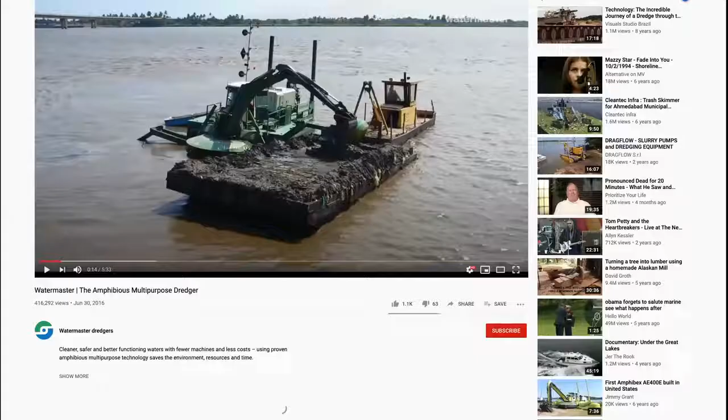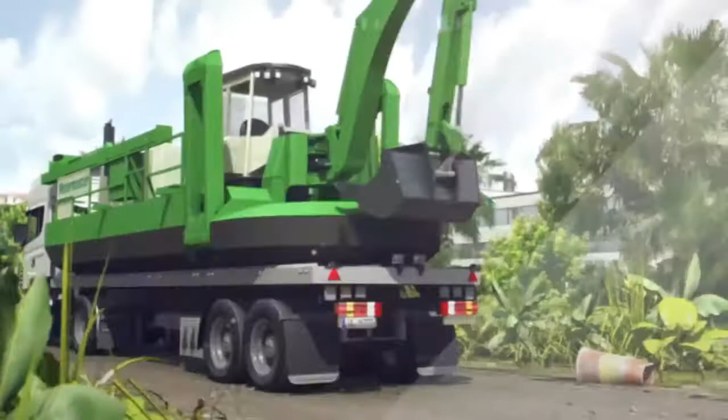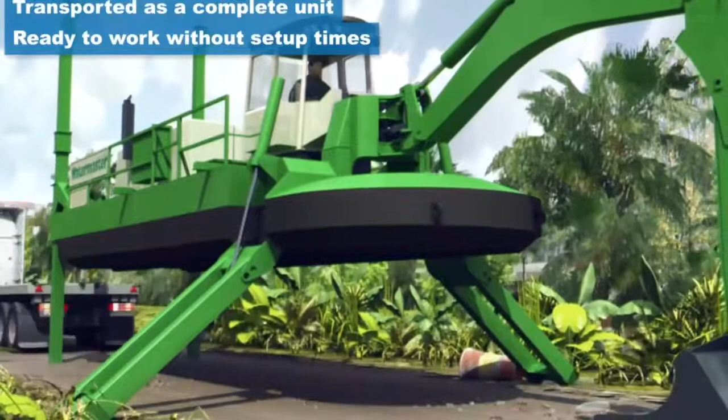Okay, Peter, lunchtime. Peter, you want to? Well, the truth is I cannot see the video. I can see all you guys, but I can't see the video.

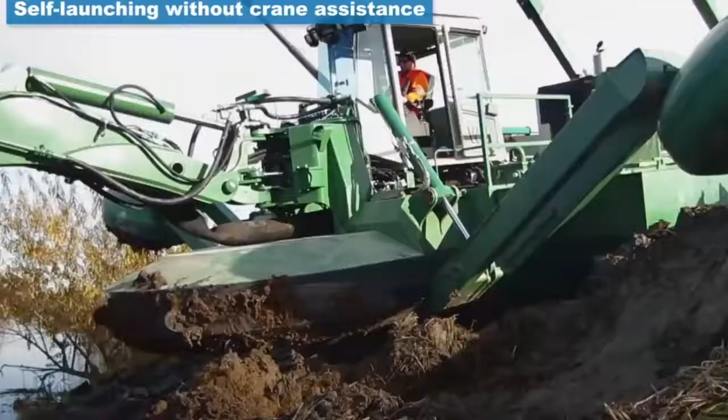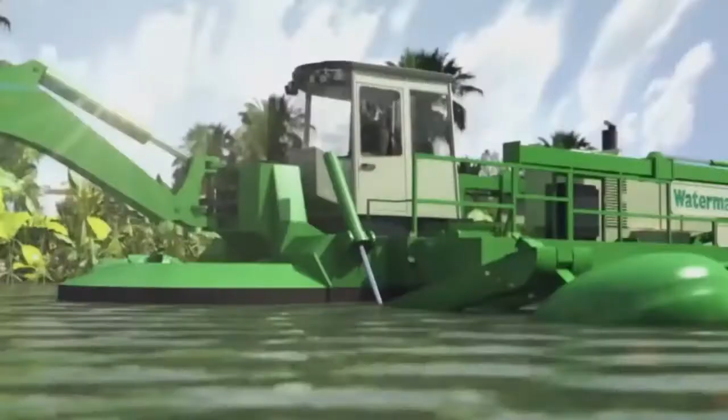You're not seeing the video. So that was footage of it. You can see how it's deployed from a lowboy, and it walks hydraulically off the lowboy, and then can walk into any body of water. So no cranes are necessary to deploy this. Then it is self-propelled, it will do approximately up to 5 knots. Very nice. And it will do all manner of maritime construction up to 20 feet in depth, from shoreline to 20 feet. That's our niche. Very good.

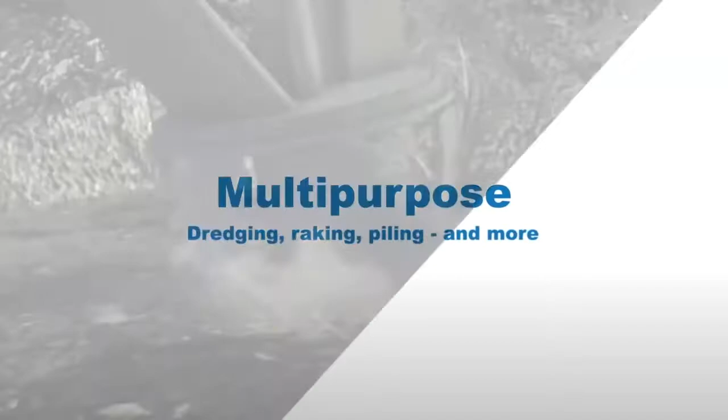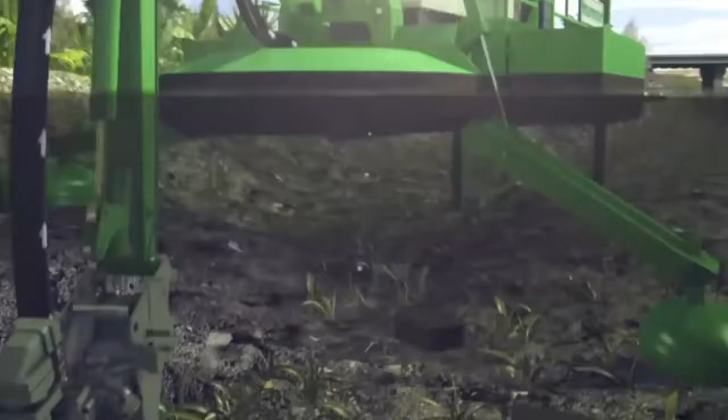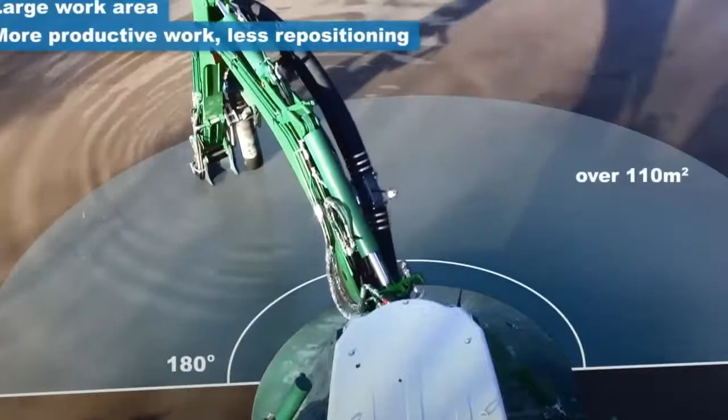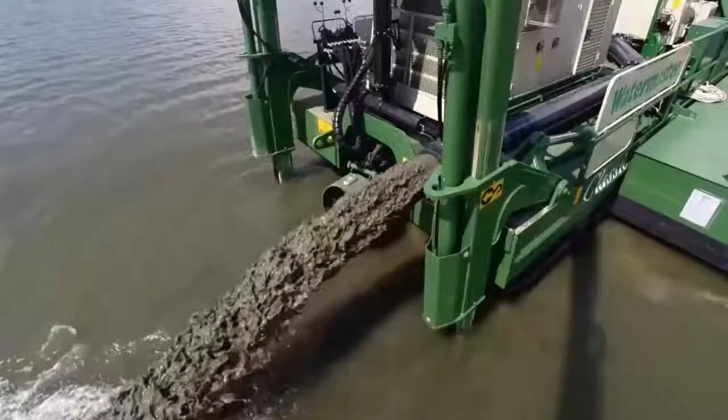It'll do traditional hydraulic dredging. It'll do mechanical dredging with a variety of different buckets we have, including environmental clamshell and tooth bucket, as well as a material bucket. It covers 130 square yards of area for every pass it makes, so it's a highly efficient vessel in terms of the dredging process. You're spending more time cutting than you are moving, and this is a huge feature of this machine.

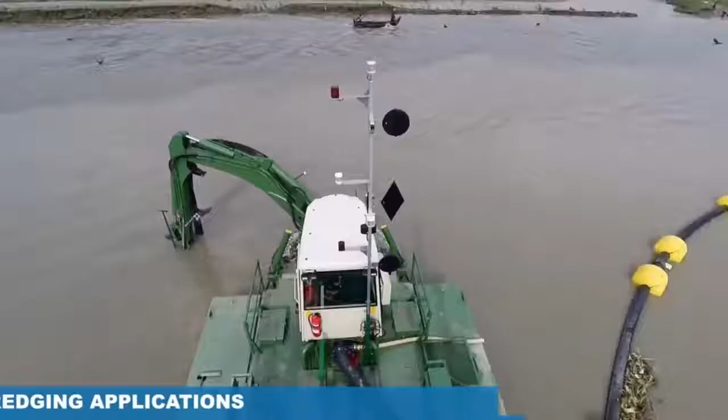It'll also do rainbowing, but we don't see much of that done in the US.

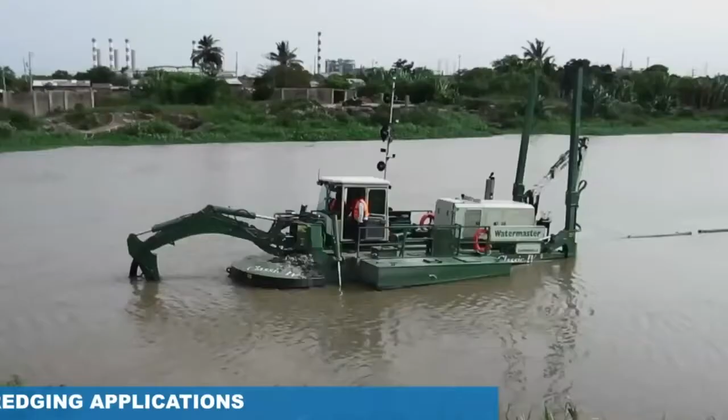It's got a comfortable operator's cab. It has no digital readout, so it is reliable. It will not fail the way we see a lot of digital components.

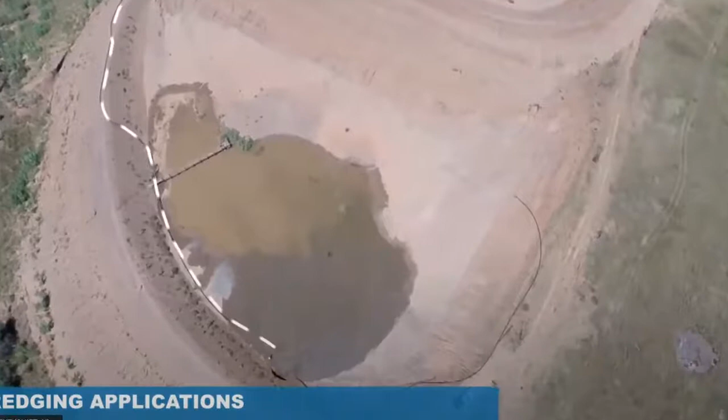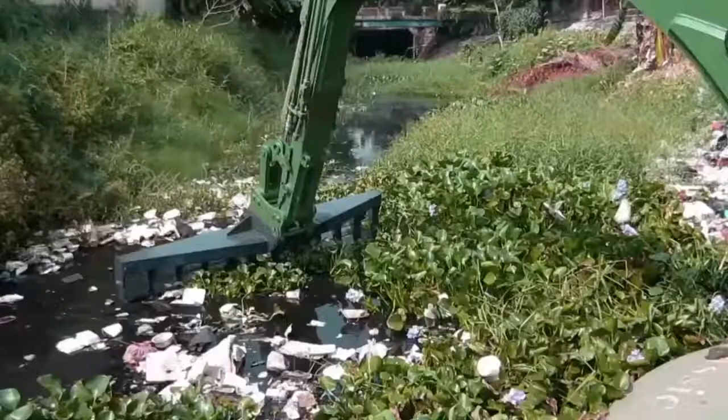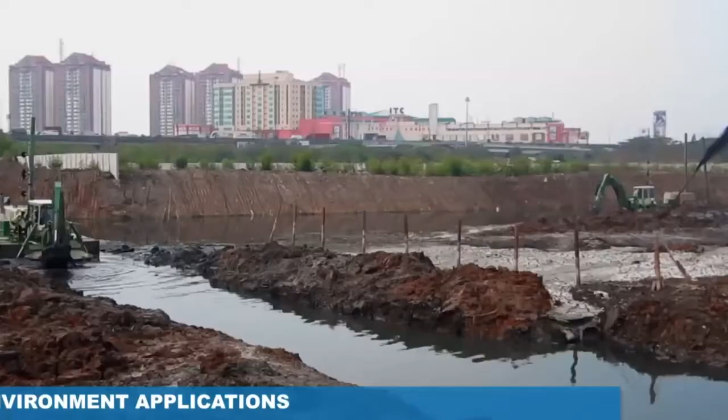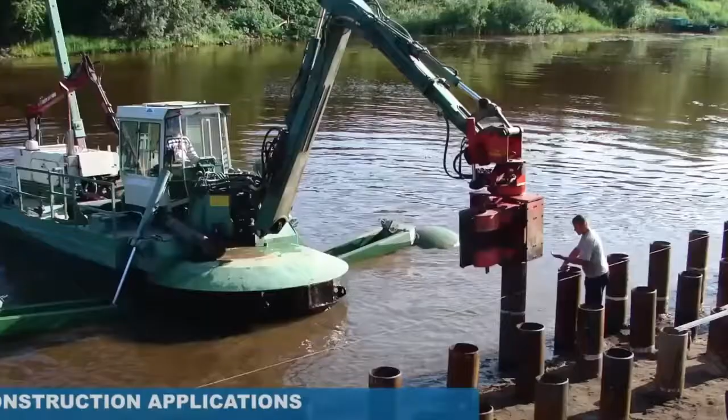That's a good point. It's designed for the third world, so that allows us to use it too. Well, what I like is it's one guy doing all of these functions. So clearly what happens is you're going to see lower operational costs, both in equipment. There's less equipment required to do a job, and your fuel costs are less, your labor costs are less. So it's a very cost-effective piece of equipment.

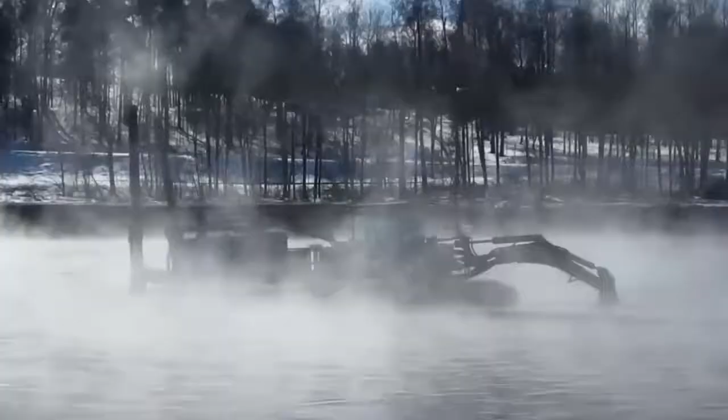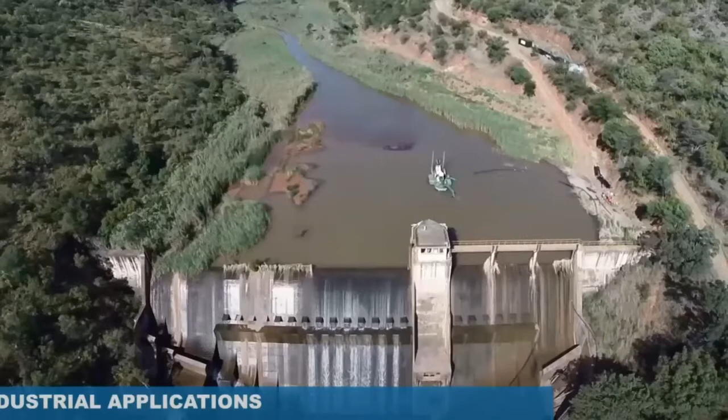It does all manner of pile driving. It will do underwater demolition. It can lay pipeline. It's being used this winter for ice breaking. It's used all over the world for mine tailing ponds and in power plants, in their fly ash ponds, for dam maintenance.

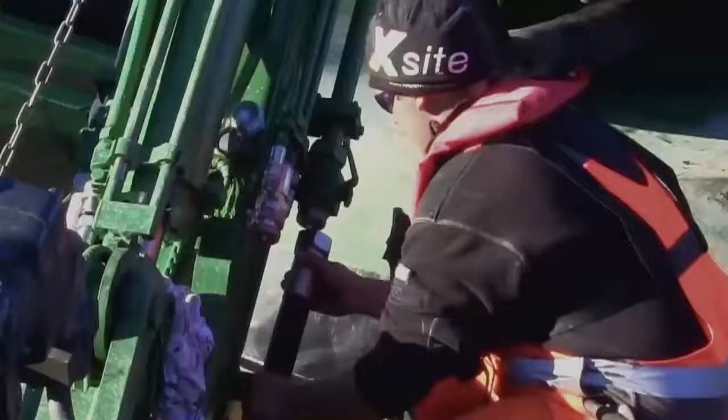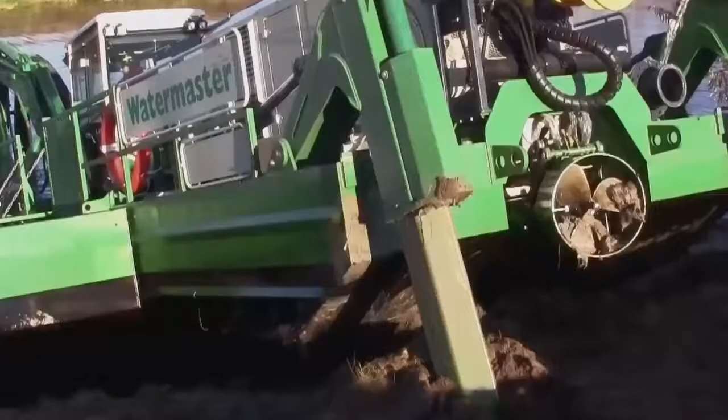And what about the engine, Jonathan? The engine is a Caterpillar C7.1, 275 horsepower, Tier 4 Stage 5. So it is CARB compliant.

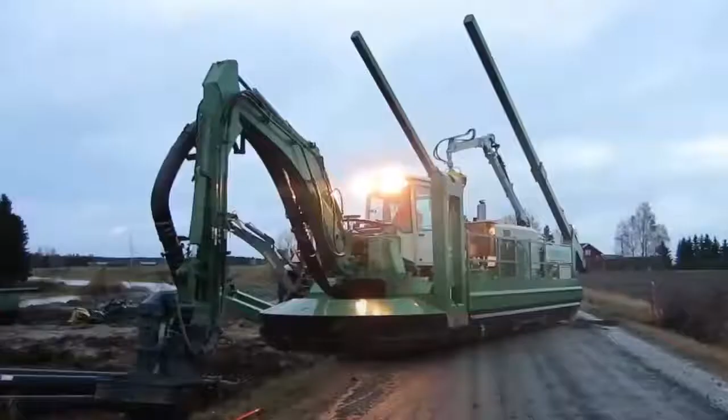Fantastic. Very, very good, guys. This is my favorite part. Yeah, a lot of people say that.

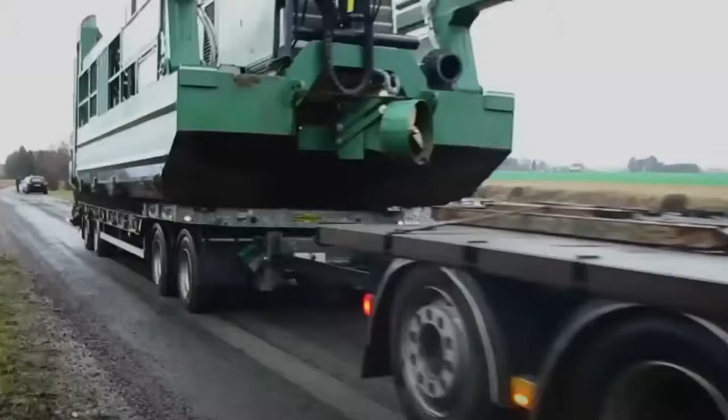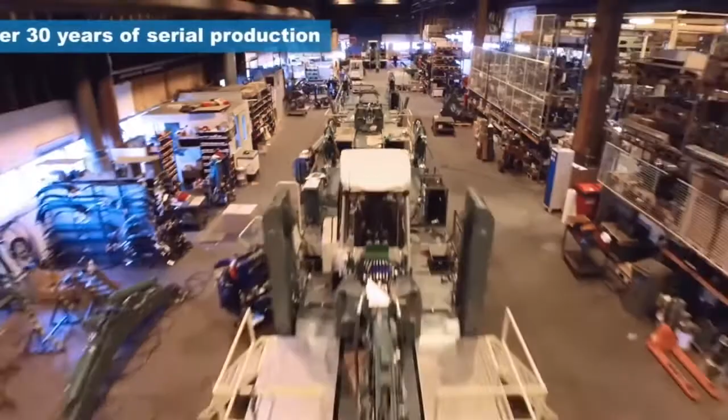Impressive. What company is operating this up in Petaluma? It's not being operated up in Petaluma. The Petaluma dredging is a different project. Okay. And this is a shot of the plant in Finland.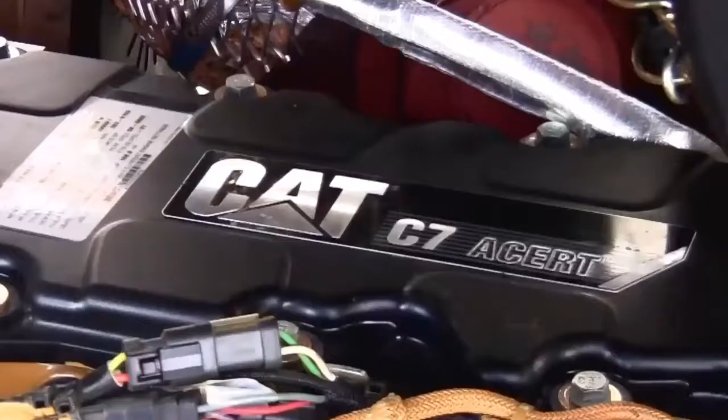It's a very sophisticated operation. As you can well imagine, the engineering is absolutely first rate coming out of Scandinavia. I'm sure you're well aware. Again, it's sold in 70 countries. We provide 2 weeks of training with every unit sold at no charge.

And that's the video. And there are 30-year-old machines still operating.

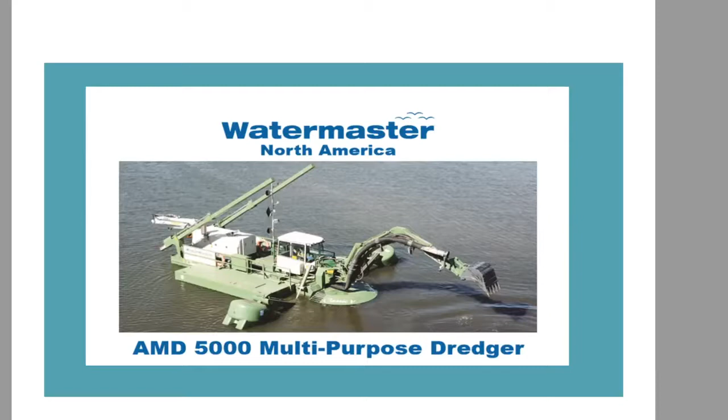The purpose of this unique vessel is to provide you with the tools to make clean, safe, and well-maintained waterways. And once you see how this thing operates, you'll understand how it could fit into your waterway management program. Next slide, please.

This versatile machine, the heart of this is the proprietary cutter head, and it's a 10-inch cutter head. It runs at 5,000. The hydraulics run at 5,000 psi. It has a 10-inch discharge pipe, which is capable of pumping up to a mile away without a booster pump, and an eddy pump. It can pump straight water up to 1,000 cubic yards an hour, but it will typically pump between 125 and 200 cubic yards of sediment an hour.

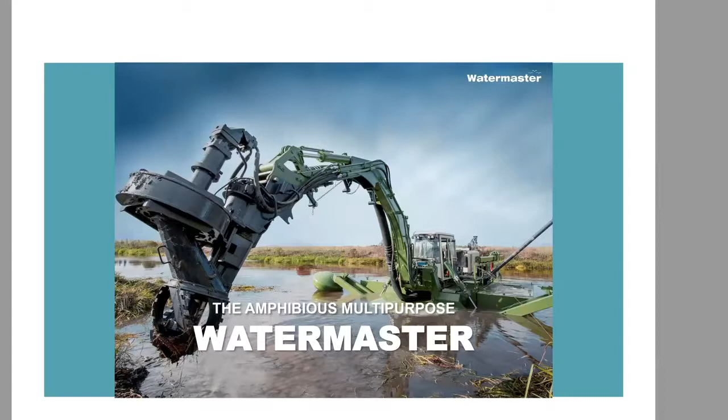So let's go to the next slide, please. In addition to that proprietary cutter pump, there's a wide range of attachments for this thing. You can see in the forefront, there's a 3/4 yard environmental clamshell. Next to it is a toothed 3/4 yard excavating bucket. There's a 9-foot rake for weed removal. There's a head which is on it there for wooden pile drivings. There's a Movax, which is capable of sheet driving for seawall construction. And there's a number of other things, including a jackhammer. So there's really a wide range of options. Next slide, please.

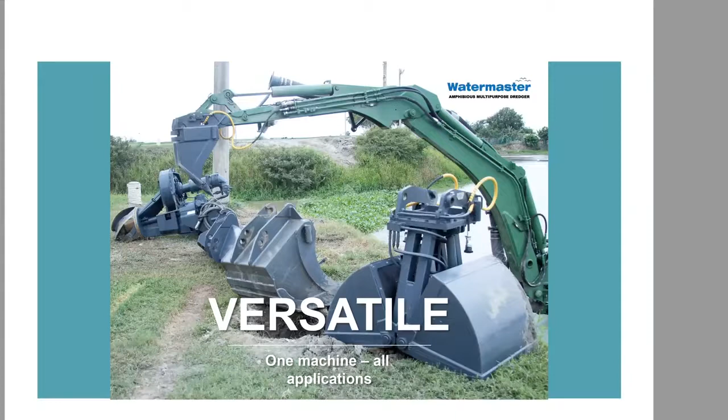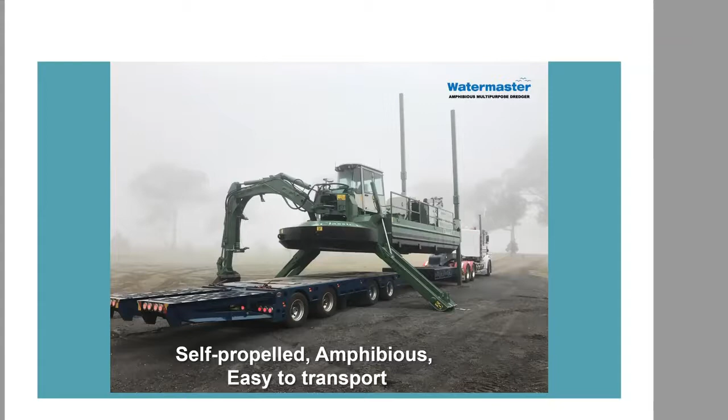It can go on a standard 25-ton 2-axle lowboy, easy to load, takes very little time. You could use a gooseneck triaxle on a 1-ton to take the other attachments and the pontoons. The vessel itself is 10 feet 9 inches wide, so it is a wide load, but it does not require special permitting nor escort vehicles.

This is a proven and field-tested piece of equipment. It's been out there for 3.5 decades and in 70 countries.

Now we've had the opportunity to start distributing it throughout North America, and we are seeing an incredible amount of interest in this thing, both in the US and Canada. Again, it is Jones Act compliant. We have our documentation from the Coast Guard, from the NVDC outside of Washington, and each vessel will come with a certificate that stipulates it is approved by the Coast Guard for use in coastwise waters.

Most of the time, this vessel is used for dredging. It can do hydraulic dredging, pump into disposal areas, and rainbow. It can also do excavation using the mechanical buckets, and that's the majority of what most of our clients use it for.

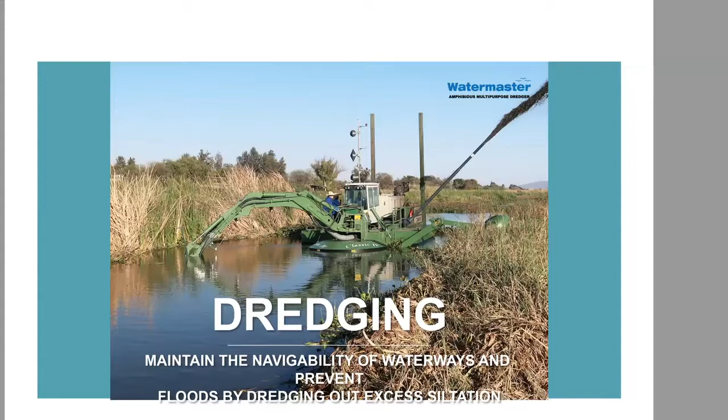Here's a shot of it doing mechanical dredging. I think this is down in Thailand or something. Most of this equipment does go to third world nations, and this is a good place to segue into the components used in this vessel.

Perhaps the parts you would have trouble sourcing locally are the parts for the cutter head, and we are sourcing those. We will have our own inventory, typically the seals, the bearings, and that sort of thing. Most of our customers are going to be purchasing those with the machine so they have them on hand when this thing requires maintenance. So this is a very straightforward, simple machine to maintain. All the components are top drawer, and they are available virtually anywhere. I can get most of these components for this thing right here in Ann Arbor.

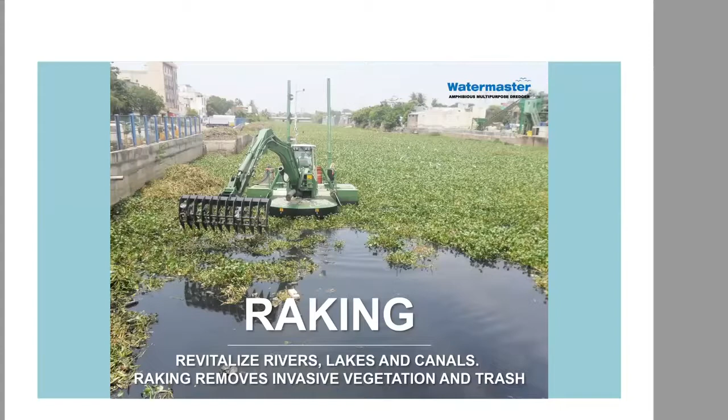Again, for environmental work, for remediation of invasives, I think that's a problem everywhere. I know it's a problem right here in Ann Arbor on the Huron River where I go out kayaking. So this is something we speak with DNRs in various states about. We just spoke with the DNR in Maine, and this guy, when he realized what it could do, both raking and with the hydraulic cutter head, which has a really interesting option of a cutter knife you can attach, so you can dig down and actually cut up the roots of cattails and physically remove the structure and pulverize it and pump it again up to a mile away, this machine has a lot of options to address a lot of different problems that we're all facing.

It'll do pile driving. If you want to do dock construction for marina work, it can remove them. Also, if you have concrete work that needs to be removed underneath the water, we have the hydraulic demolition jackhammer. We also have the Movax, which has the ability to drive sheet steel for seawall construction and repair.

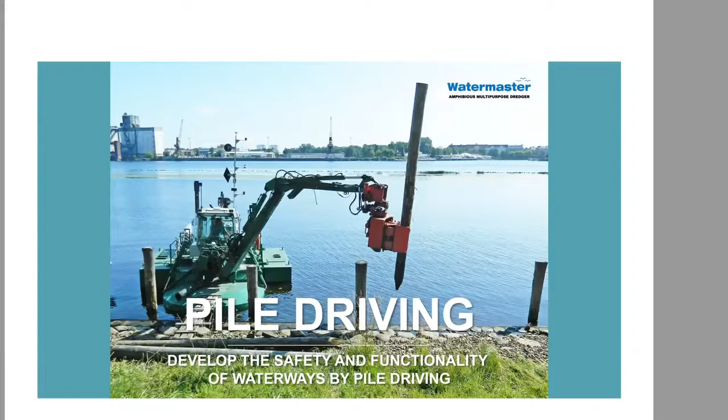Again, we're not competing with Manson or Dutra trying to clear out channels for Panamax freighters. We're in the shallow to 20-foot range, and that's our niche. Some people ask frequently, well, I've got a project at 30 feet, can't you modify it? The answer is no, we cannot modify it. You're going to have to find another means. We only go up to 20 feet, and that's how this machine is designed.

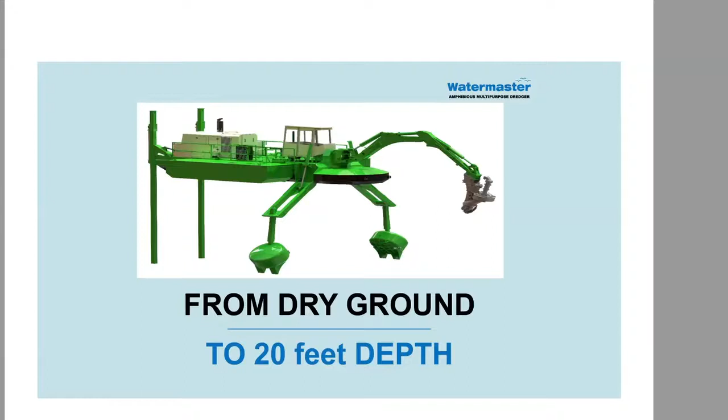This is really ideally suited for marinas, with the hull length being 36 feet and just over 10 feet wide. It is really adept at getting into tight spaces and maneuvering in close quarters, doing a wide variety of work that's required in any marinas or ports. So it can do maintenance, new construction, reconstruction. It just depends what you're looking for.

We just sent off a quote to a large Canadian port, and they wanted one of everything to maintain their port. They literally asked us to put a quotation together for every single apparatus attachment we had available. Next slide, please.

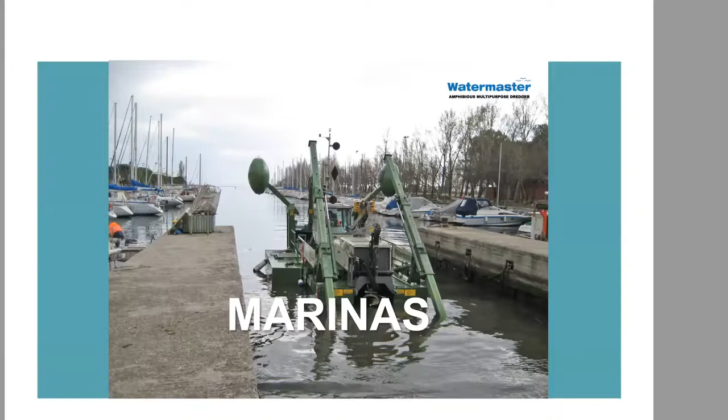So this machine is designed to maintain our waterways, to keep the shorelines stable with the pile driving options. It will do all manner of maritime construction and maintenance that is required to keep our waterways well maintained. Next slide, please.